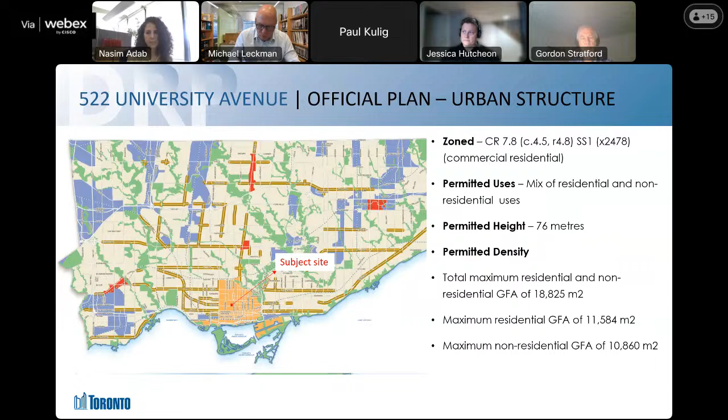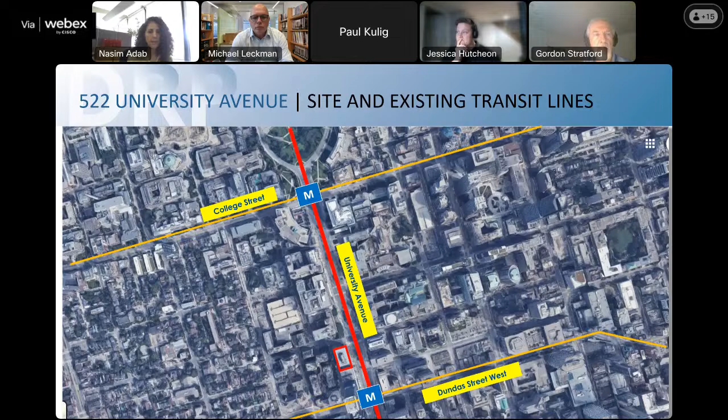The site is located within the downtown and central waterfront area, and the as-of-right zoning is CR with a maximum allowable height of 76 meters. 522 University is designated as mixed use in the official plan, and it is very close to many institutional lands. The site is also close to a number of existing surface and underground transit lines and stops, including the University Avenue subway line and College and Dundas Street streetcar lines. It is located on the southwest corner of University Avenue and Elm Street, with 3 main frontages ranging from 38 to 62 meters, and is about 2,400 square meters in size.

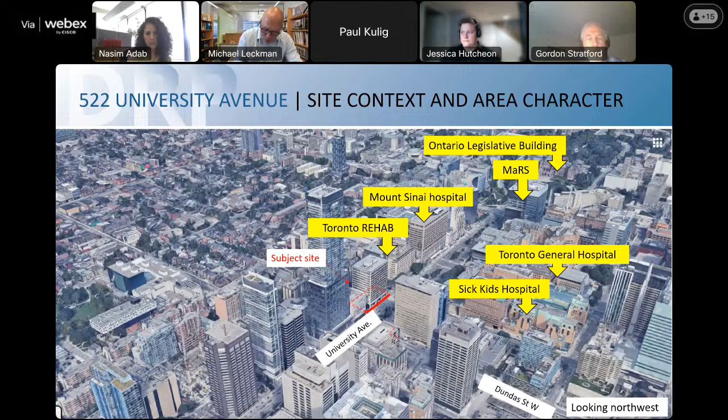I will now go through a couple of bird's eye views to better understand the context and character of the area. This is a view looking northwest, identifying many important health and science related buildings, as well as the Ontario Legislative Building, with the subject site identified by the red boundary. Another view from the opposite angle shows the prominent typology and built form that contribute to the defining character of University Avenue.

As previously mentioned, the tower is proposed to be located on top of an existing building which has heritage attributes. This building was built in 1972 for National Life Assurance and was designed by renowned modernist architect John C. Parkin. The property has been identified by the city as having cultural heritage value, characterized by the treatment of all four elevations with a gridded concrete frame above a colonnade of concrete columns. A heritage impact assessment has been requested, and the site is subject to a view corridor which protects the City Hall silhouette as viewed from the north sidewalk of Queen Street. I will provide more details on that later.

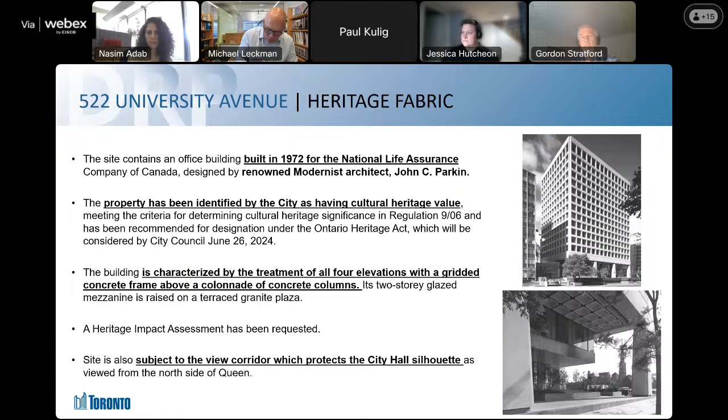The existing 14-story building is characterized by the depth of its punched windows, robust columns, and materiality, which is precast concrete.

The building is attached to a two-story component on the south side of the property, which I'm showing here with my cursor. This two-story building is part of the subject site, which stretches from University Avenue to Simcoe Street.

There are a number of towers already built on University Avenue. There's also a concentration of modernist architecture, which contributes to the ceremonial character of this corridor.

As discussed previously, the existing building is an interesting combination of different layers and attributes. Here is the boundary of the site, starting with the footprint of the ground floor and columns.

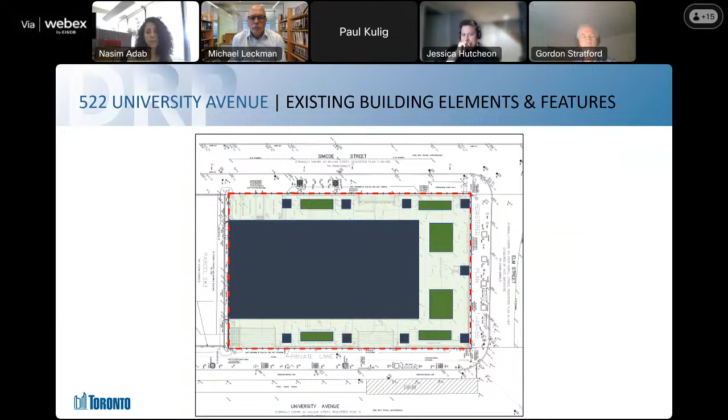Under the building, there is a semi-covered plaza, which is a combination of hardscape and planters. The plaza is sitting above the street level on all sides, which we will show in the following pictures.

To access the plaza and enter the building, users need to walk up the stairs shown here with the yellow color, or they need to use the ramps shown with the orange arrows.

The access to underground parking and loading area is on the south side of the property and along Simcoe Street, shown here with the blue arrow.

And finally, the building sits on top of this open space with very robust columns.

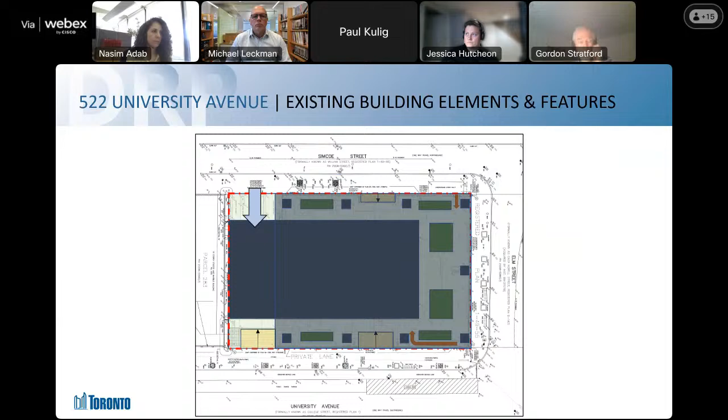And the applicant's design team suggested redirecting it to Elm Street for better accessibility.

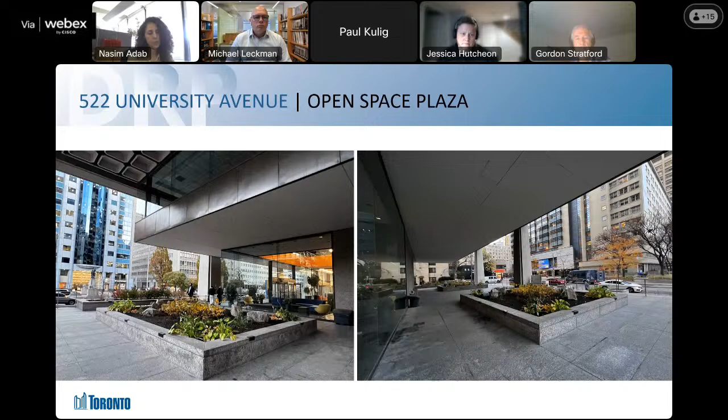The next few pictures focus on the landscape features in the plaza. Some of the planters are bigger with more vegetation, and some are narrower, but all have a similar design language.

On the ground floor and along the edges of the building, there are retail spaces which set back from the property line, and you can see one of them here in the picture to the right.

Moving to the discussion of planning policies, the City uses many planning policies and frameworks to ensure the delivery of good planning and healthy, complete communities.

These documents include the Ontario Planning Legislation, Provincial Policy Statement, and Places to Grow. One of the most important documents we use is the Official Plan, which provides direction with respect to heritage conservation, land use, built form, and public realm. But for now, I'm going to highlight one of the important key policies related to the view corridor.

This policy elaborates on the importance of Queen's Park Legislative Assembly, Old City Hall, and New City Hall as important sites with great prominence, and therefore any visible intrusion behind the silhouette of these buildings should be prevented. Additionally, the view to the building should be protected from any obstruction.

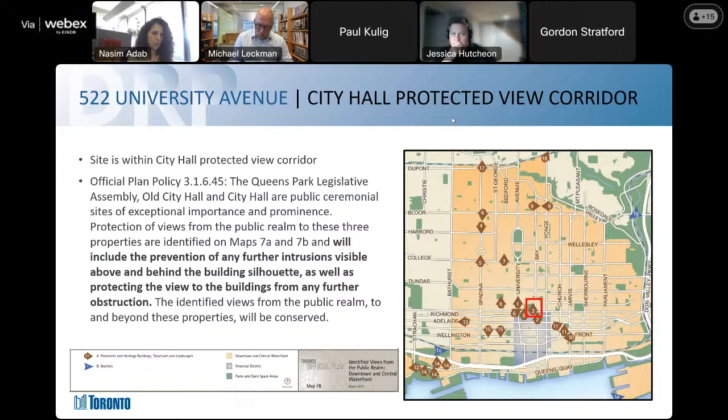Since the site is located within the downtown area, many of the downtown plan policies will also apply. I will go through them very quickly.

Starting with the Health Sciences District, the policies talk about non-residential uses within this district to support institutional growth, and that buildings should create appropriate physical connections to contribute to the district's ability to share resources, facilities, and technology. There are also some policy directions regarding the importance of public realm expansion and enhancements.

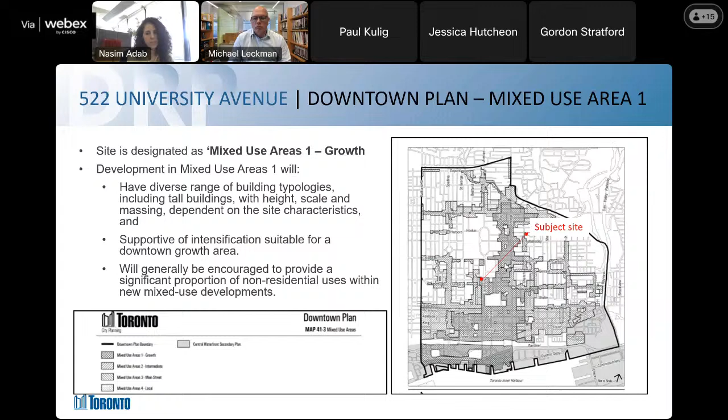The site is within Mixed-Use Area 1, which means there will be a diverse range of building typologies, including tall buildings, depending on the site characteristics. It also emphasizes the importance of non-residential uses. Based on the downtown plan, there are also some protected parks in close vicinity.

However, there will be no shadow impact on those parks and open spaces coming from the proposed development.

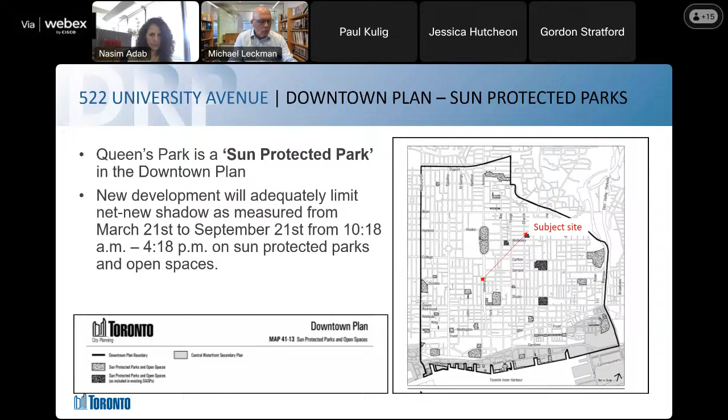Finally, the subject site is along a designated great street, University Avenue. Based on these policies, the development will enhance the civic role of such streets and improve mobility. Public realm improvements will create a unified streetscape that identifies the character and heritage value of each segment.

Improve the scale of pedestrian clearway and public gatherings, and prioritize tree planting. There are also a number of important guideline documents that the City uses to evaluate a design proposal, including but not limited to tall building design guidelines, growing up guidelines, and pet-friendly guidelines.

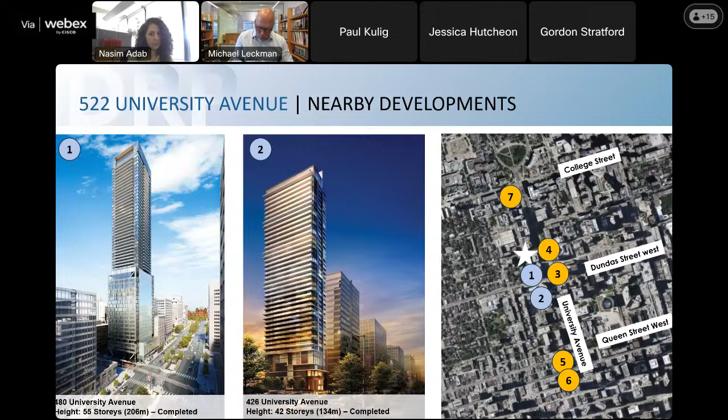Using these planning frameworks and performance standards by both internal and external teams, University Avenue has already seen and will see a great level of intensification. Some of these approved, constructed, or under review and appeal tall buildings include 480 and 426 University Avenue, 481 and 505 University Avenue.

You can see their location with the blue color on the key map to the right: 200 and 250 University Avenue, and finally 700 University Avenue, which is a bit further from the site at the intersection of College and University Avenue.

I will now provide a quick overview of the proposal that was brought to the DRP session back in November 2023, starting with the Heritage Building. The applicant's team talked about the Heritage Building, its conservation and approach to intervention. Parts of the building were proposed to be retained, and some areas were proposed to be reconstructed or removed.

The retention of 60% of the interior and exterior of the building will also help with minimizing the carbon footprint. There were some comments from panel members regarding the materiality of the reconstructed part and how it can celebrate and pay homage to J.C. Parkin's building.

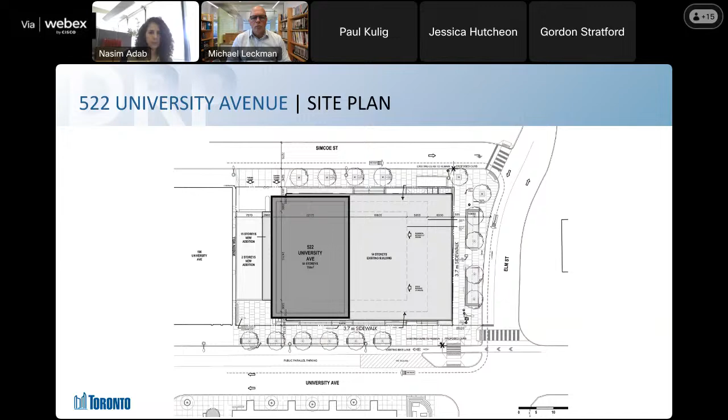Above the existing building sits the tower. The location of the tower is directed to some extent by the conservation of the heritage building. There were some discussions around design solutions and how to create a harmonious relationship between the tower and the existing heritage attributes. I should also mention that the office component includes the base, meaning the existing building, and the backdrop that you see in this rendering, which is a new addition.

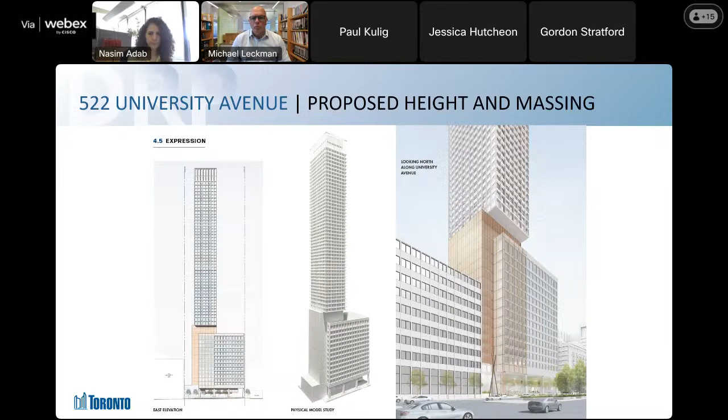In terms of public realm, we received comments from panel members regarding the streetscape and open space plaza. The proposed design looked at relocating some of the stairs as well as one of the ramps, but keeping the parking and service access in the same location. It also considered opening up the edges of the site to provide more greenery, a sense of openness, and sitting places, as shown in the next few slides.

The proposed improvements also include the curb realignment along Elm Street, as well as new trees and a bike lane along University Avenue. This is a view from University Avenue looking north, and the proposed changes show improvement with sitting places, tree planting zone, pedestrian clearway, and more vegetation, as well as the bike lane.

Another view looking south on University Avenue, showing the grade change from the sidewalk zone. Again, the proposed improvements show the openness, the seating places, and more greenery. Simcoe Street looking north, and the proposed design showing more greenery. Just a reminder, these are all from the previous package that was submitted by the applicant's team.

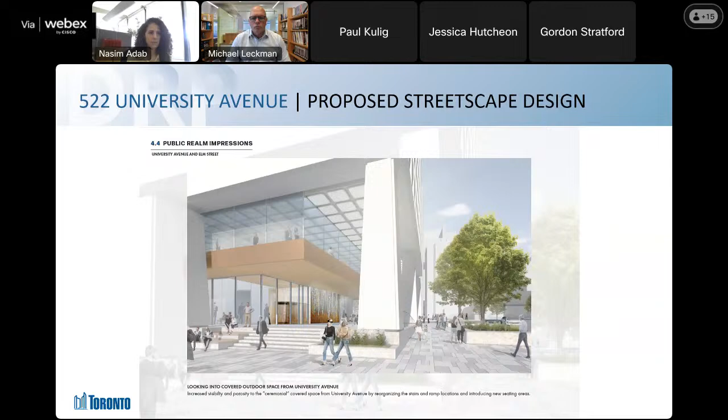A view to Elm Street looking west, showing the new stairs, planters, and sidewalk conditions. Lastly, the applicant's design team talked about the sustainability approach, and how high degrees of TGS and minimizing embodied carbon can be achieved through the conservation of the existing building, orientation of the new tower, window-to-wall ratio, green roof material, and energy performance methods, to name a few.

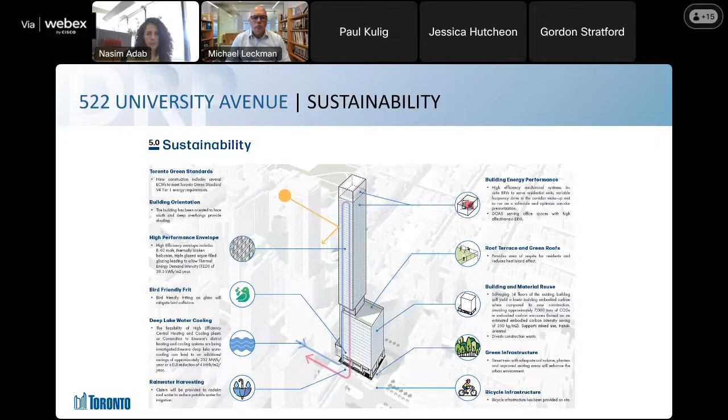With that, I can now move to the issues of focus. We would like to seek the panel's opinion about the following issues: the conservation strategy in relation to the significance of the existing heritage building on University Avenue as a civic corridor.

The conservation strategy for the existing heritage building in relation to embodied carbon and other sustainability strategies in general; public realm, ground floor plane, street edge and sidewalk conditions; treatment, activation, and accessibility of the plaza and its relationship with the proposed uses; materiality and treatment of the south end of the existing building; and the design relationship of the new tower with the existing heritage building, its attributes and character, in the context of University Avenue.

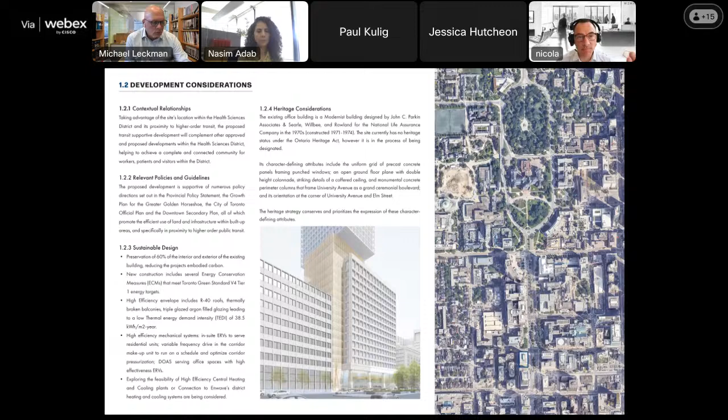Nasim really well described the overall building, so I won't go over it from an overall standpoint. She talked about the contextual relationships, the relevant policies, some of our sustainability features, and the heritage considerations. Now, one thing that when we read through the minutes last time, we wanted to clarify exactly which pieces of the building are coming down and how we're addressing it, because some clarification was needed.

The existing building is, diagrammatically, on the left under number 1, existing conditions. That's a rectangle building that Parkin designed, and it has 4 major columns along University Avenue and Simcoe Street, and then 3 major columns along Elm Street.

The portion that we are demolishing to make way for the new tower is the portion that's hatched in red, and it's roughly around the 3rd column from Elm Street.

And once we do that and design the building and reconstruct a portion of it, we actually reconstruct it in the exact same footprint as what we demolished. And then we have a small podium that's required to hold up the tower that we're putting on top, which you see in the background here.

That's the part that in our renderings is colored in that orange color. So we call that the backdrop.

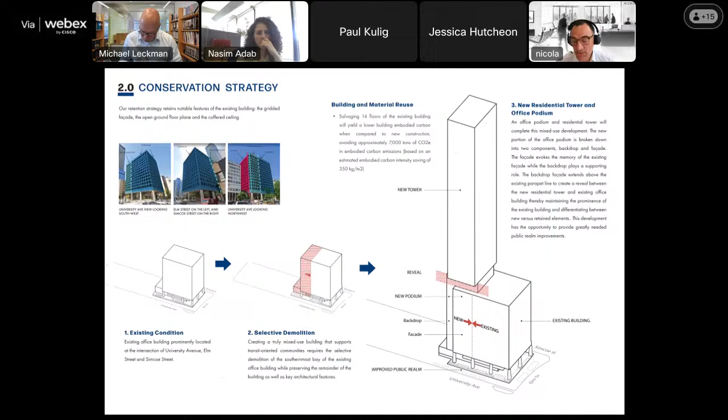So the next two slides, I'm going to hand over to Sharon from ERA, and then after that I'll pick up and address the issues that were brought up in the last design review panel. So Sharon. Yeah, thanks, Nicola.

Sharon Hong from ERA, I'm a planning associate here. Pleased to be coming before you again on this project.

As Nicola said, with ERA as the heritage consultant on the team, we worked collaboratively with WZMH and RJC to get to a place where some of the key moves of the design are driven by and inspired by the key character-defining attributes of the building designed by John C. Parkin. Firstly, there's that open ground floor plane speaking to this democratic modernity of the Parkin design, with the indoor-outdoor fluidity expressed through details like this coffered ceiling treatment.

Secondly, this open ground floor plane itself functions as this extension of the public realm, with its prominent situation on University Avenue, and the monumental columns framing University Avenue as this grand ceremonial boulevard.

And then there's the building on top itself expressing this uniform geometric grid of precast concrete, which is actually by Beer Precast. They played an important role in building concrete modernist Toronto. They also worked with Parkin at New City Hall as well.

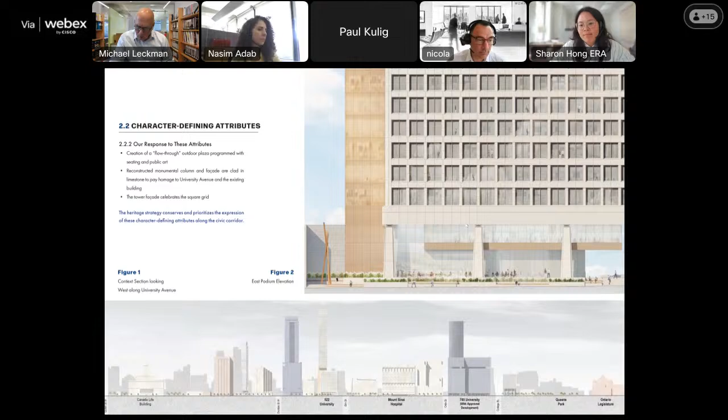I won't read this extensive list here because I've provided it for you, but by and large, when we read through the minutes, there were these themes that came out, and we picked on some of these issues and addressed them in our presentation, starting with the streetscape, the public realm and plaza. You'll see a little bit more development on the public realm, and in particular in the covered space below.

Our approach has always been about engagement, about trying to engage University Avenue, Simcoe, and Elm Street, because as it stands, the existing building really doesn't do that. It's almost like a barrier that's been placed on the podium level. But our approach is engagement, so we're basically deconstructing a lot of those planters that were there, reconstructing them in a way that people can inhabit them. We've also developed the covered plaza, which I'll show you in a few minutes, that engages as well.

There was a comment on the accessibility ramp, and we tried really hard to reorient it. If we were to reverse its flow, as was suggested in the minutes, it becomes too long and doesn't fit between the two columns, and it would need an additional landing and so on. So we kept it in its current configuration, which we're happy with. As you come up the ramp and finish at the top, you actually get this beautiful view down University Avenue, so we're happy with that experience.

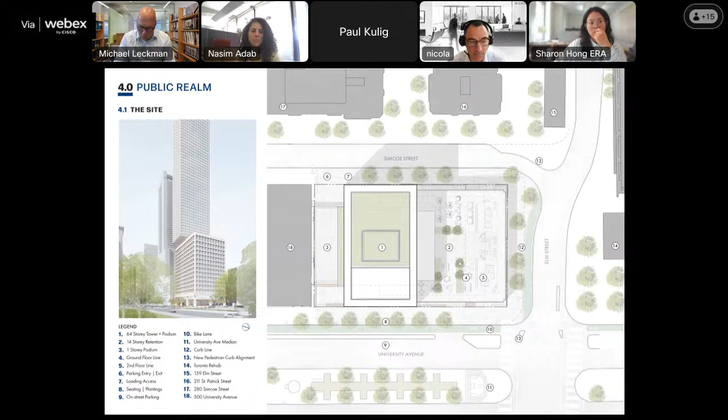From a site planning standpoint, Nasim mentioned where we are. I won't go through this too much, except to show that we've actually developed the roof terrace in greater detail. I'll talk about our site plan just to give you one update on our public realm.

If you've been to the site recently, you'll know that University Avenue is currently under construction, and they're building this bike lane now. They're building it to roughly a 5.7 meter right of way from our property line to the curb of the bike lane. 3.7 meters of that is a clear sidewalk width, and the remaining 2 meters is taken up by a planter and a buffer strip between the planter and the bike lane. That's the current configuration being constructed now.

A little bit about the ground floor plan. On the University side, we have the entrance to the office, number 2, and the lobby to the residential, number 3. Number 1 is that covered outdoor space we talked about, with the planters Nasim showed in the pictures. It's an uninhabited space for the most part — every time I've been down there, there's really nobody underneath there — and we want to change that. We want to make that an engaging space.

So we face the two entrances to our residential and office onto the plaza. We again take the planter that's there, deconstruct it, and turn it into fun, animated seating areas. Then we make something of the solid wall facing north onto the plaza to animate that space even further. One thing Nasim noticed is that our original staircase was between columns 2 and 3 — we've moved it to really play on the flow-through aspect that Parkin had in the original design, which was a flow-through lobby.

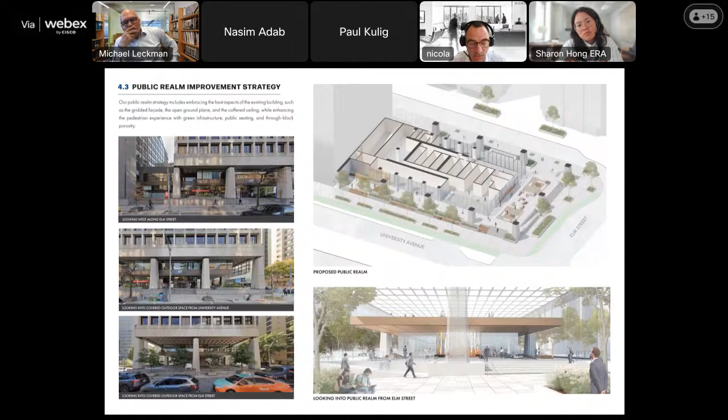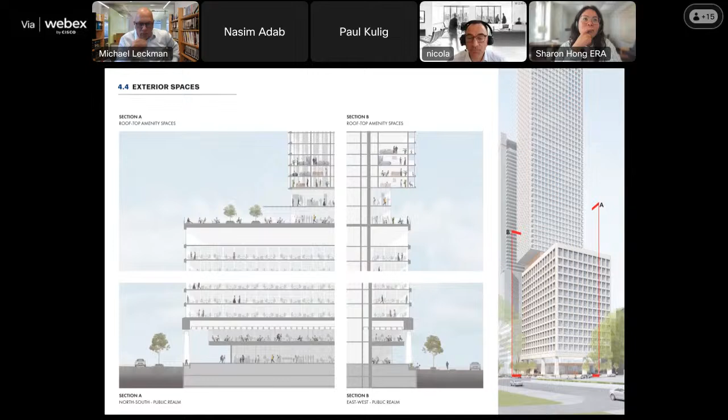We're proposing a limestone for use there. We find that quite interesting because we think Parkin used the smooth precast concrete to actually mimic limestone, and now we want to introduce limestone to mimic the precast concrete. We feel that's a really nice way to tie it into University Avenue as well.

Our public realm remains relatively the same as what we presented last time: 3.7 meters wide, planters, a buffer, and then the bike lanes.

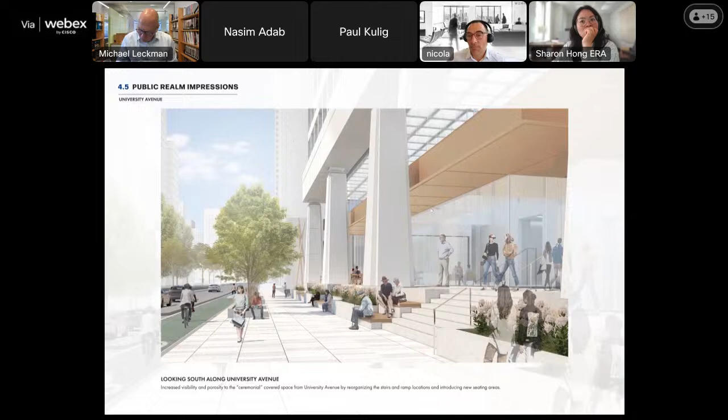The upper plaza, right now the existing condition that Parkin left us with, has this very transparent lobby, an office lobby that we're picking up on and want to make even more clear by introducing glass fins as a support to our curtain wall, and the floating box that is up above. That's one of the things we love the most about this building. We really want to retain that and play up on that.

Looking into the covered plaza from University Avenue, you can see the porosity we're creating through the site, really inviting people up to that plaza level, and looking at creating an opportunity for an engaging art piece underneath that space. It could be this wonderful sort of landscape being projected onto a screen to really warm up that space. Of course, we're in downtown Toronto, a lot of concrete and steel, and we want to introduce more greenery, more images, but in a way that's playful and introduces public art into the space.

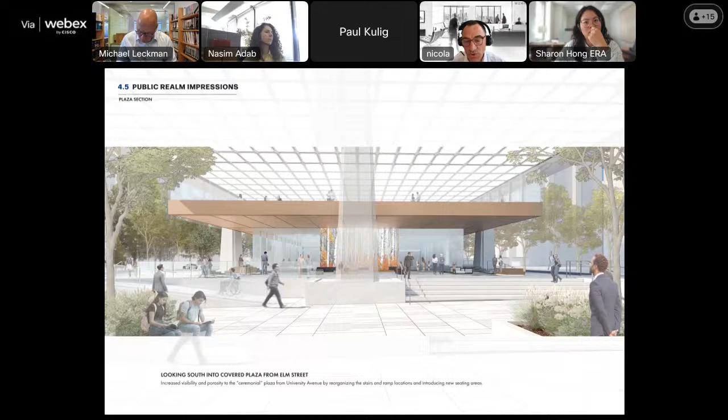You can now see the distinguishing features between the precast facade by Parkin and our new facade, knitted together with the limestone, introducing new joint lines that distinguish it from the existing building, but still tying it together with the same proportions and same window openings.

I talked a lot about our expression, and we've advanced that quite a bit, both in imagery and in our floor plans, so now our floor plans match our elevations. There were some questions as to how the grid actually turns the corner.

We've got that sorted out. We've created datums along each floor that are the same. Then as we turn the corner to the balconies, we actually adjust the sloping profile slightly just to allow for that balcony to work.

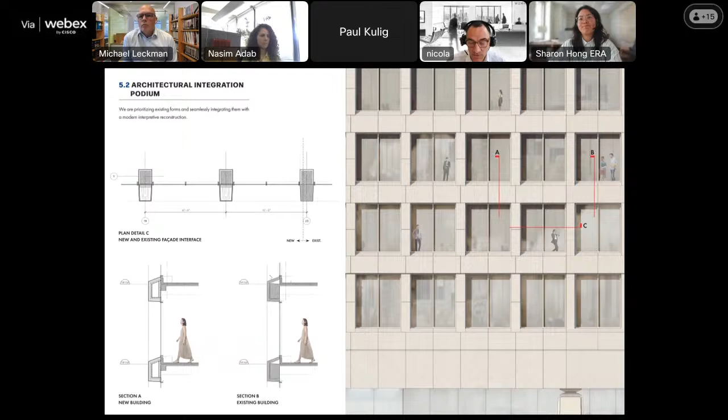Nicola, you've got just a few slides left. Is that right? Yeah, that's correct. Thanks, very good, Michael.

So here we have the gridded facade, and we've sorted out how we're venting with mechanical louvers, how we've created this nosing, and where the louvers happen on the facade to make it very consistent. We've also looked at how the metal panel is actually being constructed. We think the fins will be done in two-story lifts, with these nosings placed in between them, and likewise on the balcony section, a similar approach.

Then I've spoken about materiality. We studied what is the lightest material we can put on the building that still gives us the look we want and has the least amount of embodied carbon. Metal panel turned out to be one of the better solutions because of its lightness, its flexibility from a design standpoint, and it still gives us that deep grid expression.

In the connecting section, or this backdrop section, we're using a textured glass facade, and we're looking at various metal meshes that can be embedded in the glass to give us a very distinct but background look. Our introduction of knitting the old facade with the new using limestone, we think, is a very nice way to tie the two together.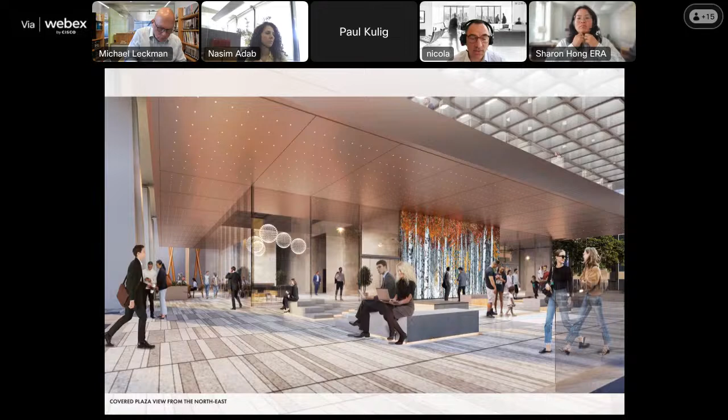A view from the public realm along Elm Street, then our intersection of University and Elm, and then our overall view from the north.

From a sustainability standpoint, we are striving for more electrification of the building. We've got now 30% of our heating systems will be electric, and we're looking at partial electrification of the domestic hot water. Deep lake water cooling is still in the feasibility stage, and we're looking very closely at that.

We've limited our underground construction to 2 levels, which from a carbon footprint standpoint makes sense. I've mentioned how much we've saved by using the existing building. And from a building orientation standpoint, we've now got deep overhangs to provide a lot of shading.

Our balcony to wall floor ratio is about 39%. So we've got 39% balcony, and over 60% of it is non-balcony, but yet 8 of the 12 units still get balconies, and the other ones get Juliet balconies.

We've got a fairly efficient wall to floor area ratio of about 0.436. A round shape is the most efficient, but a square is just a little bit more efficient than this. So we're really pleased with that number.

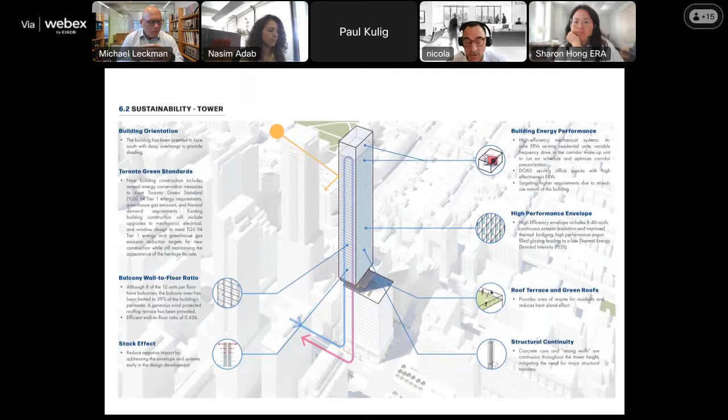We've gone through great pains to make sure that our strong walls go right down to the ground, so we're not creating inefficient structures and diagrids that involve a lot of carbon intensity. Thank you.

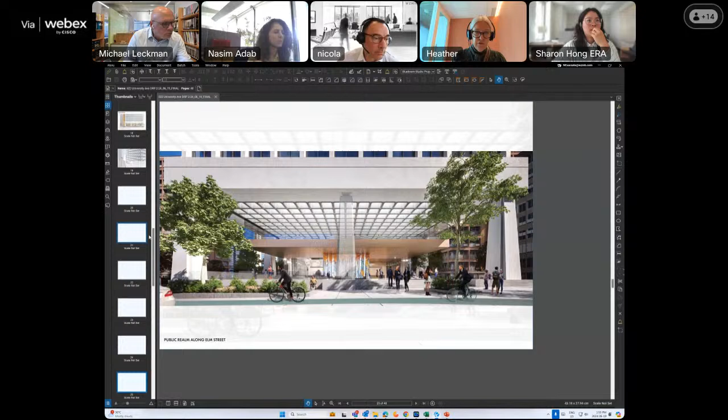And the height of the parapet or guard at the top of the existing / new office building - it looks like there's a glass backup to the precast / limestone parapet. If you could go please to page 23. I just want to concentrate on the new south, where the office building kind of dies into the copper curtain wall facade.

So there was originally a negative corner at that building, which you're retaining, but then that little bit of south facade that will be limestone is now set back. And is it a bit shorter? And that's why we can see the glass beyond it? Or I'm just wondering if you could describe that detail - it's a question from the city, so I just wanted to clearly understand it.

Thanks for pointing that out, Heather. I think there's a reentrant corner similar to what Parkin did on the north, on all four corners. So we've replicated the reentrant corner. I'm not actually sure why we recessed it like that - we have to probably study that a little bit further. It could have been trying to meet a grid in the facade as well, but I would likely look at that as almost matching the existing condition, which is more of a flush condition. So a reentrant corner, and then we go back to a flush condition as we turn. Thanks for pointing that out.

And sorry, one last question at the ground floor - there's a small section of ramp at the northwest corner.

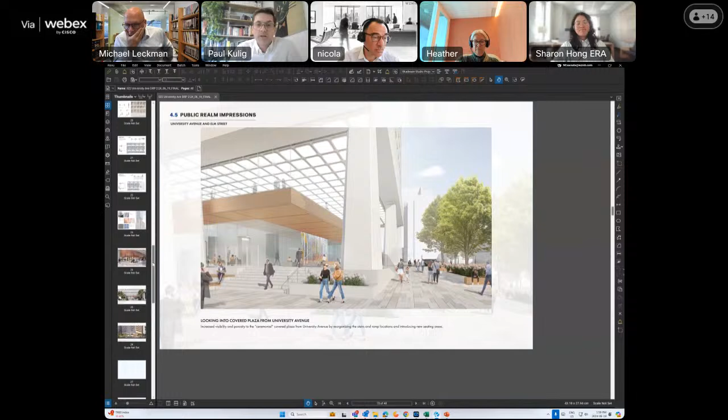Very simple question. If you could just clarify the second floor where there's the mezzanine that exists under the larger portico. There appears to be a bit of an open space to the lobby below. If you could maybe just clarify what's proposed there. It's sort of shown as generic blue office space, but if there's some other thoughts about how that could be programmed at this time, just curious where we're at.

So you're talking about this space here? Correct, yeah, that level. We feel that is one of the features of the building. Right now, when you walk the building, the coffers have been covered over. They're exposed on the soffit, but covered over in the interior space. When we look at the original reflected ceiling plan, Parkin had it going all the way through. So that's the one thing we want to retain and reinstate, to bring those coffers all the way through. They may be under the ceiling tile, I'm not sure, but they were certainly on the reflected ceiling plan drawn all the way across.

The one issue with that space, I was just at an event there last week. It doesn't have a great floor to floor height, it's a very compressed space. So I wouldn't suggest office in that space. That seems to me more like an intimate event space or a high-end restaurant type space. I'm not sure I'd recommend office in that area. I would look at that as more part of the public realm and make that more engaging as a space.

But just to clarify, that decision hasn't been made. It'll be sometime down the road as far as the actual use or tenant. Correct. Okay, correct, yeah, all right.

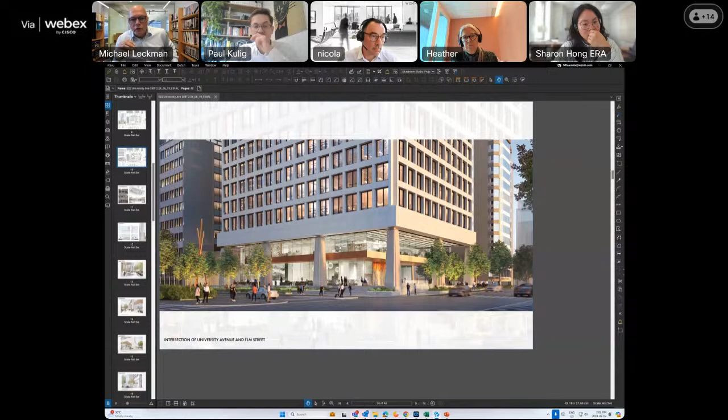Thanks Paul. Well, I'm going to use my opportunity as chair to ask a few questions, these are kind of yes/no questions. On the ground floor, under the floating second floor, you've got a mail room with a decorative screen. Is there any opportunity to consider changing the height of that space so that the second floor slab we're seeing in this view could actually be expressed as floating?

That's that area there where your cursor just was, on that north side. Sorry, not there, nope, or there. Oh, north side here, yeah. So you've got an ornamental or decorative wall finish there to make a virtue out of a necessity. Is there any chance to change the volume so that expression of the cantilevered or floating floor could be complete? And I guess the question is, could that be studied?

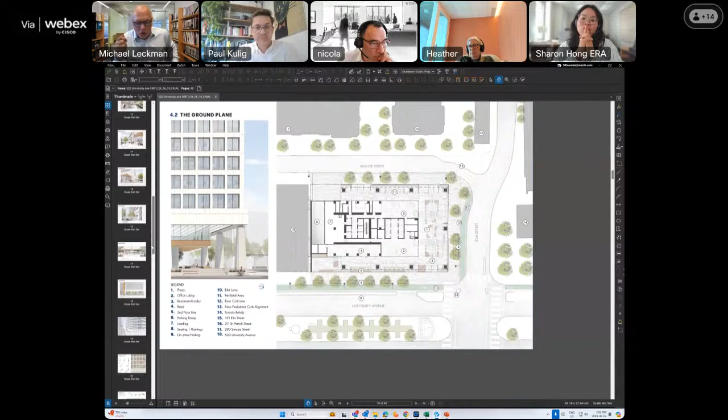So in this area here? Correct. This is currently a solid wall, there's an elevator behind this wall actually, that services the lower level. So we're keeping that elevator right now. Okay, that's clear, but yeah.

Second thing is, any chance of there being coffers on the tower soffit? Yeah, we are still studying that. Right now we've looked at a very simple grid. When we studied coffers up there, they looked a little bit out of place, but maybe we got to do it again and find a way to interpret the coffers differently. Part of the issue is it's not complete, we end up on a half module. But yeah, that's something we're still studying.

Is there a chance, I'll continue with these yes/no questions, in the beam that connects the massive monumental columns, there's an articulation that receives the column tops toward the north. In the drawings toward the south, you didn't echo that detailing. Is there a chance to continue that? Yes, reveal lines and so on. Yes.

And then finally, maybe the metal finish. Right now we've got precast as the existing, and we've got metal as the new. I'm assuming there are lots of opportunities to have the metal be not necessarily shiny, but have a range of possible textures that would fulfill the objective there.

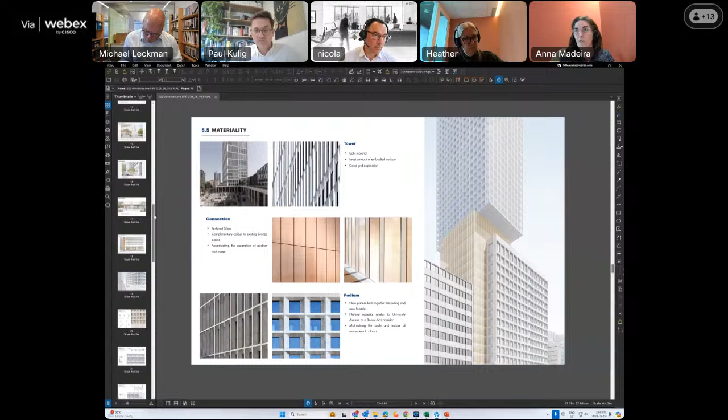One more comment on the public realm piece at the ground floor, where you have three uses: retail, office, and residential. It's really hard to distinguish those different uses on the elevation. So a few suggestions there. I think we talked about the retail and that box, and how that box might be able to help you express the retail at the base, sorry, the existing line of that podium.

And the plaza that's outside, so you've got the resi and the office both feeding onto that plaza. Now it's kind of a hierarchy question. The address is 522 University Avenue, and currently the only entrance facing University Avenue is that small residential unit. So is there a way for the office, even if you move the office entrance to the corner, so it could address both the plaza and University Avenue, is there a way for that to interact with University Avenue?

And then that leaves Elm Street for the residential expression, and that piece can feed out onto Elm Street, and give a fairly significant residential address its own place to exist. And last point, which is a small one.

Actually, I have two more points, sorry. The ramp, what you've done with the accessibility is great. Just consider that space between the column and the end of the ramp there, it's very, very tight. And that is a main entrance, people with strollers coming down there, there's a lot of uses for that ramp. So just think about that.

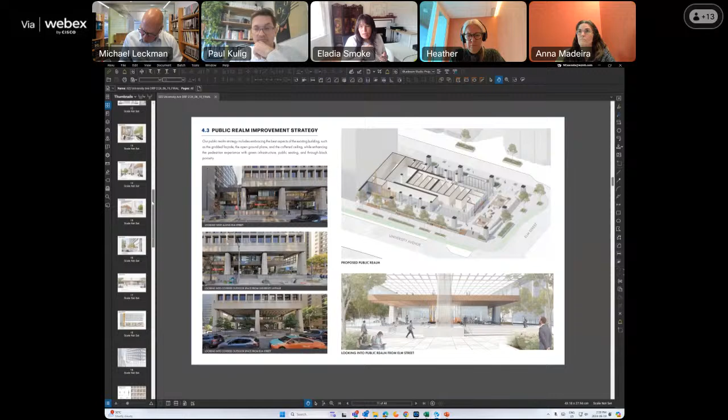Is there perhaps even a really innovative way of reflecting some light back in under there, using some reflective surfaces that are taking some of the south light and catching it and reflecting it back, perhaps? Just because it's such a deep recess.

It is facing northwest and northeast, the source of many of the super problematic winds for Toronto winters. So while these gestures are really valuable, at the same time, just be very realistic about how those spaces will be used and how people will feel in them, especially temperature-wise, and whether they really are going to get used. Sort of how do we deal with those really problematic northeast winds?

Things like that, I think, would be very important for sort of a considered gesture such as what I'm seeing. So I'll just leave it there because I'm sure lots of other people will have interesting ideas. Thank you.

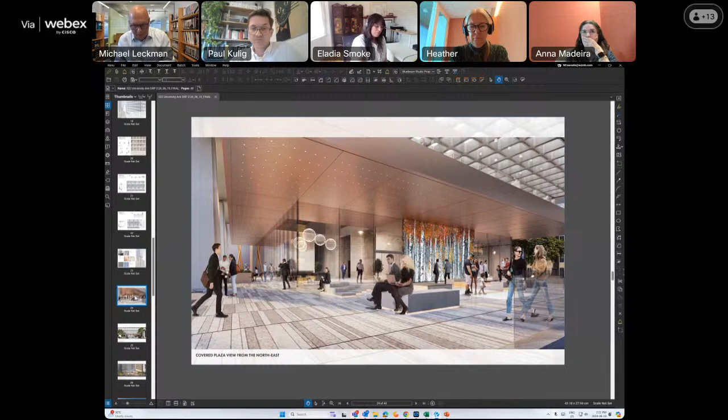All right, thank you. Thank you very much for your presentation. I appreciate the clarity of your package. It was very easy to read. And you've probably already heard a lot about the building, so I'm going to focus again on the public realm here. And it's great to see the project come back to the panel.

I took the old package and the new package and was really looking at what the subtle changes were at the ground floor. But I was pleased to see those were made. I was also pleased to see that you explored the ramp redirection, and I understand the challenges of grading on a site like this. A very small amount can make a big change at either end.

So a comment carried forward from the first review is just, I appreciate that seating on University. I think you've done a good job of sort of adding to it at that northern stair on University. The addition of the seating there just again adds to and reinforces that public edge. It would be interesting to see if there was a way also to accommodate space beside some of these seating elements for wheelchairs or mobility devices, somewhere you can get off of or out of the clearway.

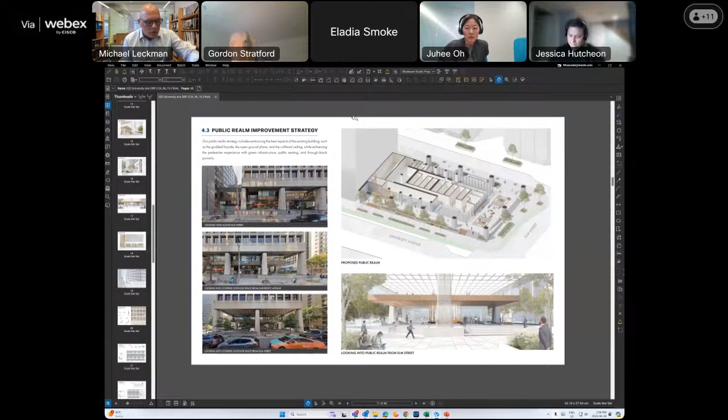On those points, we're being asked to vote. So, Lee Ann, if you could remind us of the definition of the vote.

The vote is intended to provide emphasis and clarity to the discussion and an indication of how well the project advances the panel's mandate of promoting design excellence. Support means that the panel advises that the design should continue and include refinements that were identified during the discussion. Support can be provided with a related condition or recommendation if desired. Non-support means that the panel advises that the project should be redesigned to address the issues identified during discussion. Either vote is supported by all the comments that panel members have made, and they stand recorded and will be part of the final record of the meeting today.

So I'm going to go down the list in the same order as you provided your comments, and I'll ask you for a vote of support, non-support, or support with conditions. Before I do that, I'll pause to see whether anyone wants to include any conditions on the vote. Often that's done with an electronic raised hand. I'll give that a few seconds. Usually they're pretty prompt.

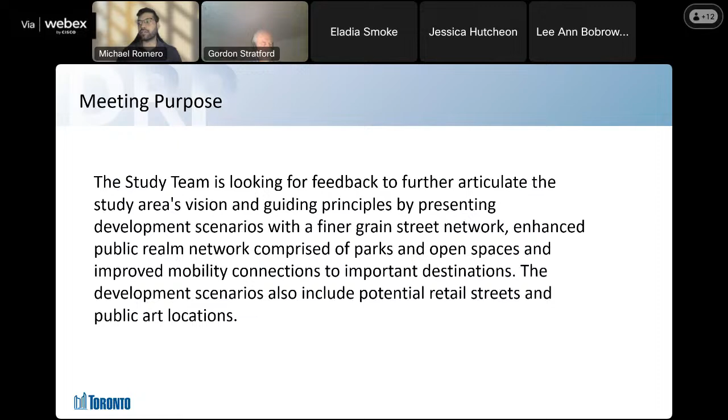Since the first meeting before the panel, the team has revised the study vision and guiding principles, and created the development scenarios we'll see today. We have a public realm plan, connections, and retail street plans as well. The intention is to update the existing Sheppard East subway corridor secondary plan and conform with the growth objectives in the growth plan, including those for major transit station areas. This team is seeking advice from the panel as we proceed to the next phase of the study.

Following council direction to update and refine the secondary plan, staff are looking to implement a new plan for the area. The current secondary plan places a focus on leveraging transit infrastructure, whereas this study looks for a more comprehensive framework which considers urban design, parks and open space, public realm, retail, and new connections.

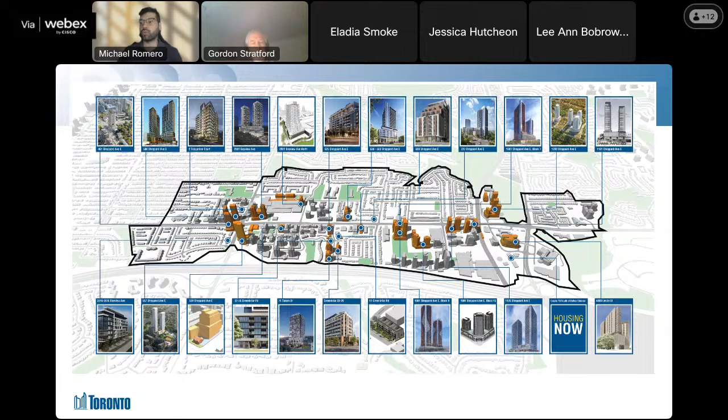A snapshot of the demographics shows that the study area has been growing within the last three census tract data periods. Looking at the population growth from 2011 to 2021, it has been greater than in the rest of the City of Toronto, and the immigration population has also been increasing at a greater rate than the city overall.

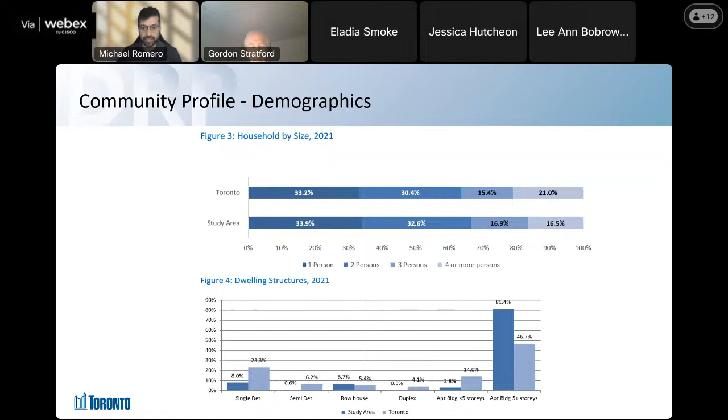Looking at figure 3, data shows that household size rates are comparable to the City of Toronto. But one thing we'd like to point out, looking at figure 4, is that intensification in the form of apartment buildings is driving growth in the study area, representing nearly double the rate of the rest of the City of Toronto.

Now looking at some of the planning policies for the area. I mentioned major transit station areas — the study area has three: Bessarion, Bayview, and Leslie. City Council adopted the MTSA policies back in 2022 for these areas; however, these policies have not yet been adopted by the Ministry of Municipal Affairs and Housing.

An important aspect the team wanted to raise is the adjacencies between stable land uses, those being neighborhoods and apartment neighborhoods, and mixed use areas where greater intensification is anticipated. A site adjacent to stable land uses requires transition per the official plan. However, these transitions may be challenged due to lot depths and lot configurations, which may also result in piecemeal type of development.

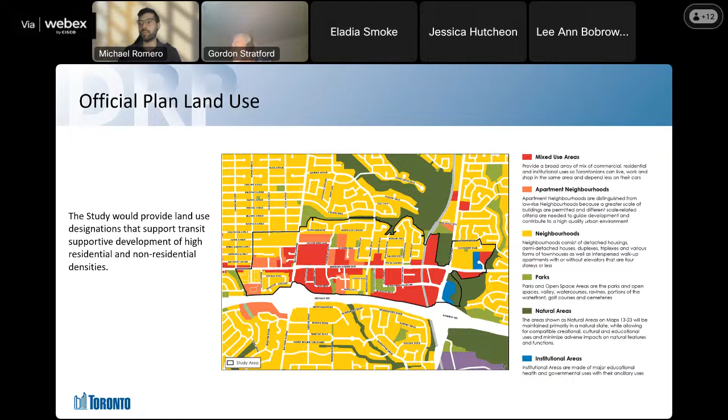As mentioned, we've heard comments from the design review panel previously, including a more refined vision that speaks to the area context. We also heard to create a much more human scale connection in the neighborhoods, as the previous plan had a very heavy transit infrastructure approach. We also heard about optimizing opportunities for greater connections to parks and new park spaces and open spaces.

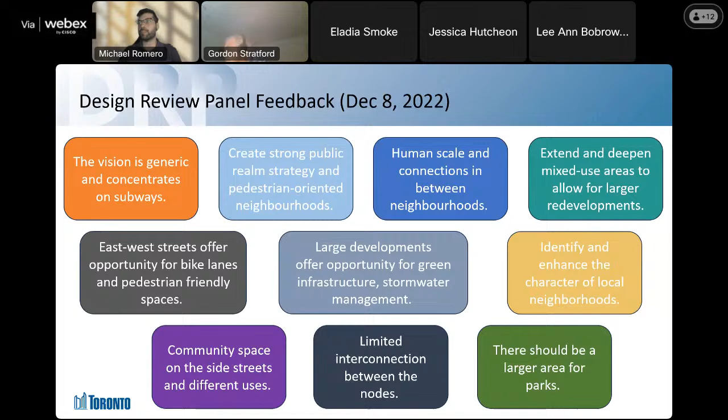The public has also raised comments such as balancing the need for housing while minimizing impacts to the street network. We also heard about creating opportunities for more parks and open spaces and connections, and about the Don River Valley system being an important character in the area.

So as mentioned before, we're here presenting a revised vision and guiding principles, among other documents. The vision and guiding principles are intended to create a more nuanced framework for the study, placing greater focus on public realm, design, heritage, natural heritage, and leveraging existing uses such as healthcare and institutional uses. The guiding principles are based on five pillars: complete, connected, sustainable, prosperous, and livable community.

And with that, I'll turn it over to Sadaf. Hi all, my name is Sadaf Pourjavaheri from the City Planning Urban Design section. We are all excited to be back with this full in-house study.

As Michael mentioned, this work is in progress and there are a number of key issues we are trying to address. The Renew Sheppard East Public Realm Strategy is the focal point for the study area.

Public realm big moves create a shared sense of place that unifies the distinct neighborhoods and reinforces community identity by enhancing multimodal travel throughout the nodes and neighborhoods, anchoring and creating gateways for vibrant retail streets along Sheppard, and enabling great transit corners for placemaking, urban squares, and social gathering areas.

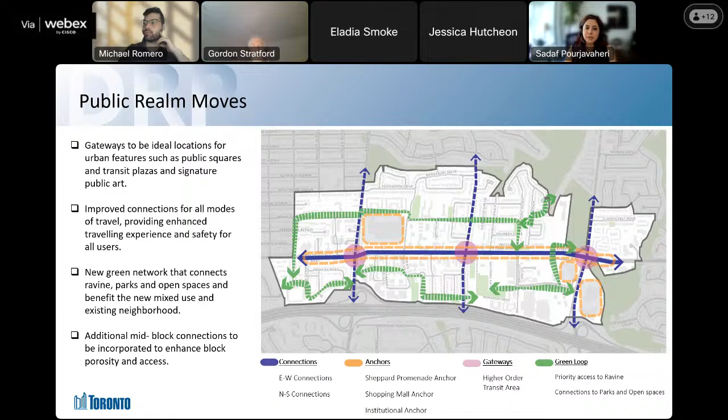This is to ensure that new development continues to grow public space and new parks. Part of the public realm strategy is to improve connections between neighborhoods and nodes to transit, local destinations, and existing, approved, and new parks.

Buildings will shape and define the character of our public realm and provide a welcoming and inviting pedestrian environment. The question we are asking ourselves is how we can enhance our public space to lay the groundwork for creative placemaking, and that's where the green loop concept comes into place.

Our study area is really large. After shaping our public realm moves and gathering feedback from public engagement sessions, we are now focusing on the pedestrian experience at the human scale, as recommended by the panel last time.

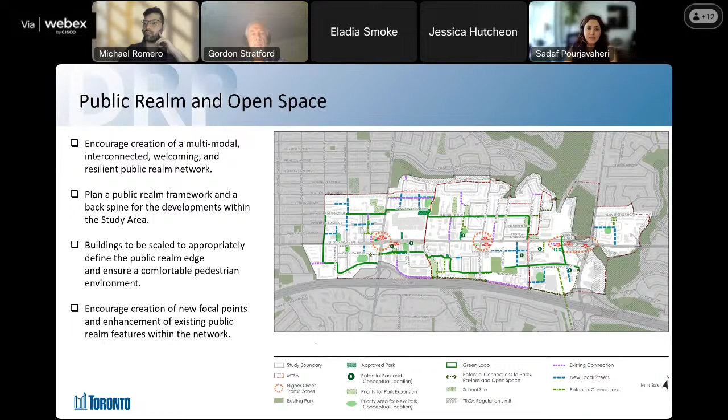Our public realm strategy supports a renewed vision to create a shared sense of place that unifies the distinct neighborhoods and reinforces community identity. Our public realm provides a distinguished layer into our design thinking, exploring elements like tree growth, stormwater management, biodiversity, swales, rain gardens, and permeable pavers where possible.

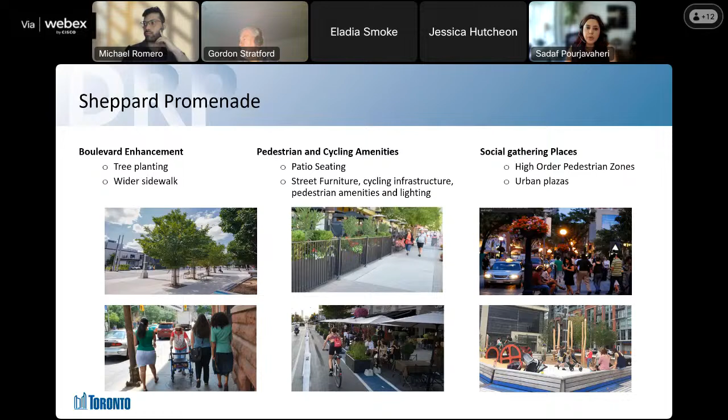As mentioned earlier, Sheppard Promenade is an anchor and spine of the study area that connects all the distinct neighborhoods and transit stations. One of our main objectives is to provide and improve consistent streetscape treatment that creates a welcoming space. With wider setbacks, we can achieve pedestrian comfort, retail spillover space, landscaping, and a double row of trees where possible, to mitigate noise and improve air quality.

As development occurs, we will have the opportunity to provide additional parkland, secured through proposed parkland from current development and future potential acquisition. Priority areas for new parkland are indicated in the conceptual park plan and reflect the most suitable locations based on identified soft sites and areas with low parkland provision.

Parkland priorities in the Sheppard East area include increased parkland supply in areas of low provision, especially around the Sheppard and Bayview intersection, where provision is lowest, and creating and expanding existing parkland in locations that increase walkability and improve the connectivity of the parkland network.

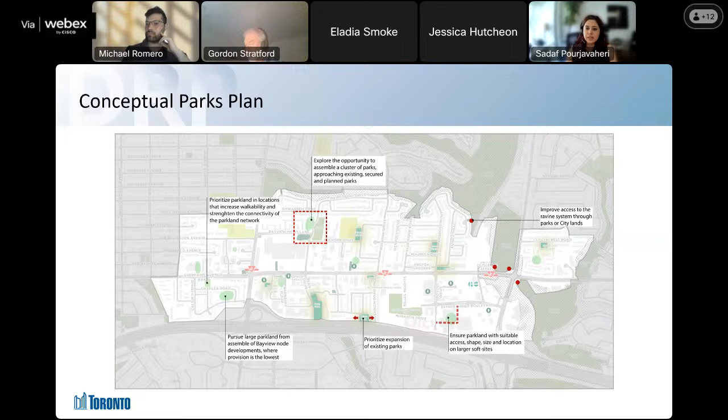Expanding existing parkland and potential future parkland assemblies of a size, shape, and location suitable for programming. We'll explore opportunities to create a cluster of parks, and as we get to the east of the study area, improve and expand access to ravine areas through parks and city land.

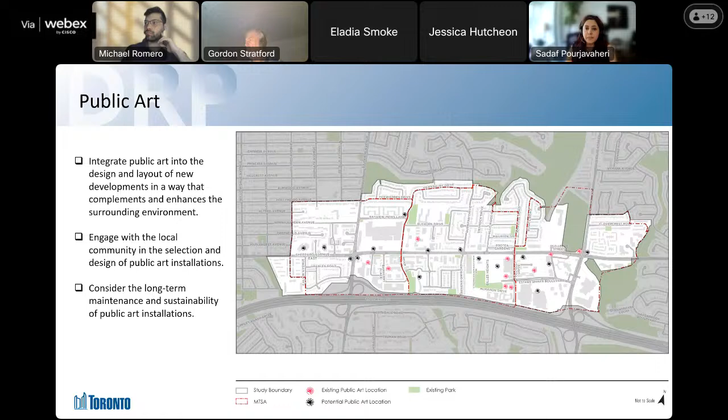Now we move on to public art. We have found it important to identify existing and potential public art locations within the study area. We are aiming to integrate public art into new development, ensuring each piece complements its surroundings as well.

Public art can be integrated into landscape, built form, or be a standalone piece.

To support Renew Sheppard's prosperous community guiding principle, we have identified opportunities to expand retail streets close to local and regional transit, and to support the expansion of employment and service uses that provide a range of business opportunities, supporting existing and new residents' daily needs at shorter distances.

And we have a question to ask the panel regarding micro retail: based on your experience, how can we encourage micro retail within neighborhoods in North York?

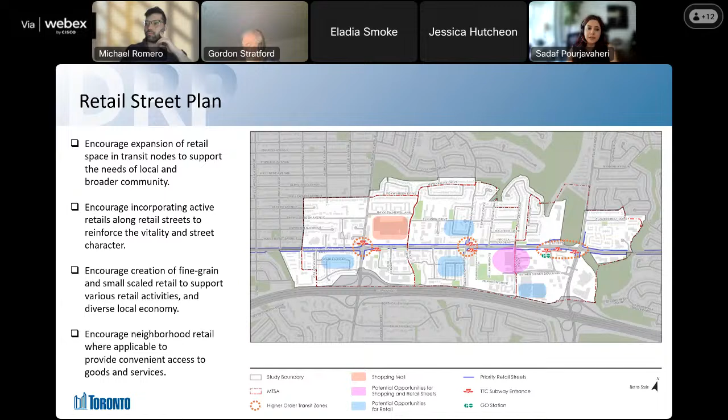Aside from appropriate retail along the Sheppard Promenade, we also allow fine grain retail within the neighborhood.

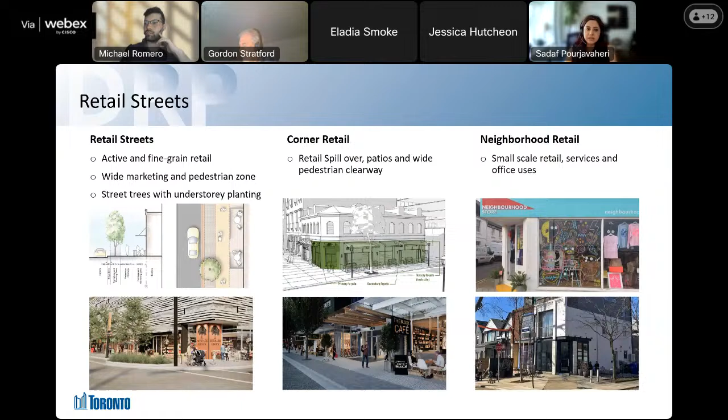The cycling network identifies the existing network of cycling facilities and trails, as well as proposed major and local cycling routes and multi-use trails. Major street cycle routes are intended to be main connection spines of the area and provide safe connectivity to the broader network of local routes.

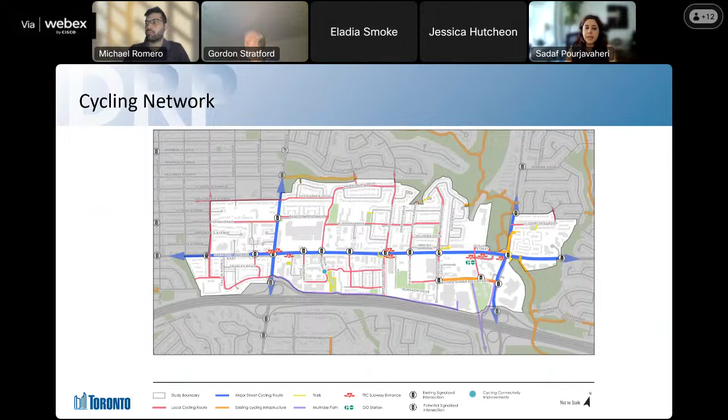Local cycling routes and multi-use trails are to provide a continuous network of links between major routes. Now I'll hand it over to Jenny to discuss development scenarios.

Thank you, Sadaf. I will be going over the intensification and transition strategy to ensure growth plan conformity. The Renewed Sheppard study directs intensification within the major transit station areas, also known as MTSA, highlighted here in red. This area represents a larger area than the current in-force secondary plan.

The existing secondary plan, Sheppard East Subway Corridor, general intensification approach was to identify key development areas while protecting stable neighborhoods in areas that we now call the MTSA.

Renewed Sheppard plans for higher levels of density that maximize the size of the area and the number of potential transit users that are within a 10-minute walk of a subway station.

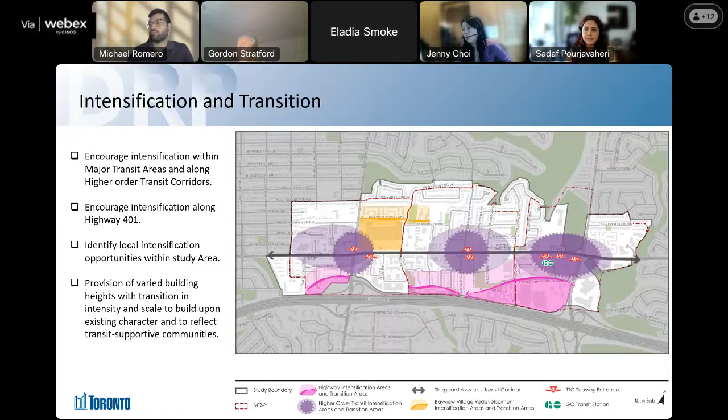These intensification areas include the highest densities closer to transit stations and corners, highlighted here in dark purple, along the highway, which is in dark pink, and lesser intensification in the transition areas, which are in lighter purple and lighter pink shades. In the next two slides, I will introduce development scenario 1 and development scenario 2, and highlight the key differences in built form, which is predominantly in the transition areas.

We've also allowed for tall buildings where lot characteristics permit, tall buildings along the highway.

And you will see that reflected in our models as well.

We used 3D modeling techniques to study the two scenario options for the built form.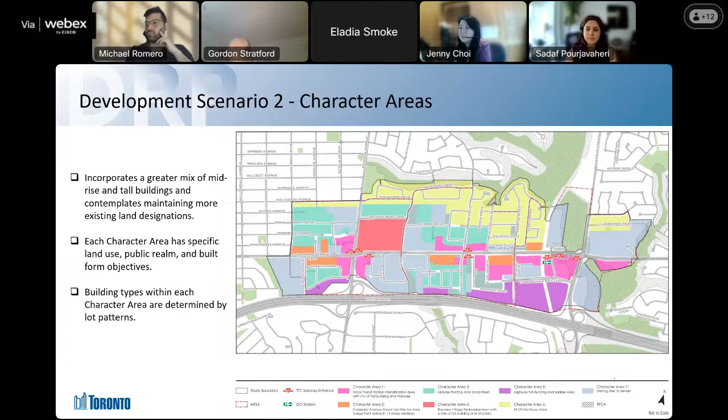Consistent with character area 2, this slide provides an overview of scenario 2, which envisions more mid-rise on Sheppard, providing for mid-rise opportunities between the highest heights at the transit stations and corners and the neighborhoods, including mid-rise opportunities along Sheppard itself.

You'll see that there is a different building typology as you move away from the transit corners, with more mid-rise opportunities in the interior transitional zones at Granley, the Irvington neighborhood, and the Talera Drive neighborhood. Further north, toward the secondary plan boundary, it also imagines preservation of existing built form, different from scenario 1.

It maintains the existing built form along Hollywood, closer to Sheppard, Protea Gardens, and the Maureen neighborhood, as well as the neighborhood on the northeast corner at Sheppard and Leslie.

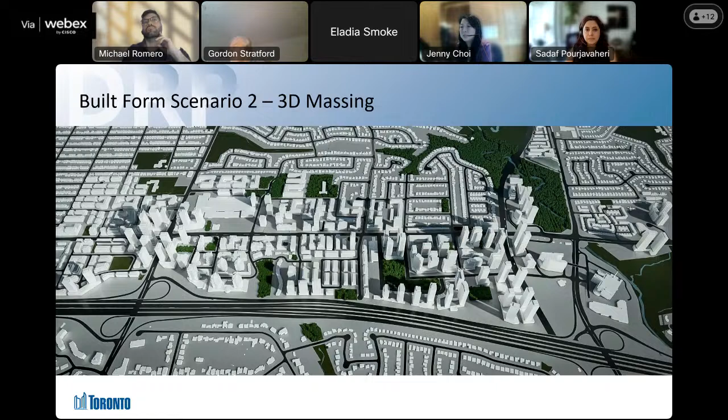Some of these areas have multiple condo ownership and multiple land ownership that puts them in the long-term planning horizon category, so they were included in development scenario 1 but not in this scenario.

Despite the differences between both scenarios, they both meet Renew's vision and guiding principles to provide complete, connected, sustainable, prosperous, and livable communities. In this sectional view, you can see the limits of the tall buildings at the transit corners, with the building typology transitioning to mid-rise buildings about 11 stories, as the right-of-way width for Sheppard is 36 meters, a 1-to-1 ratio, moving away from the transit stations along Sheppard.

This slide illustrates tall building typology along Sheppard. Currently there is no consistent front yard setback on Sheppard. Renew Sheppard encourages a consistent street wall, and where setback patterns are inconsistent, placing the base building at the required setback helps establish a pedestrian-oriented context, a high priority for residents. We aim to improve the public realm along Sheppard through this study and development review, alongside the Sheppard Avenue East Complete Street work.

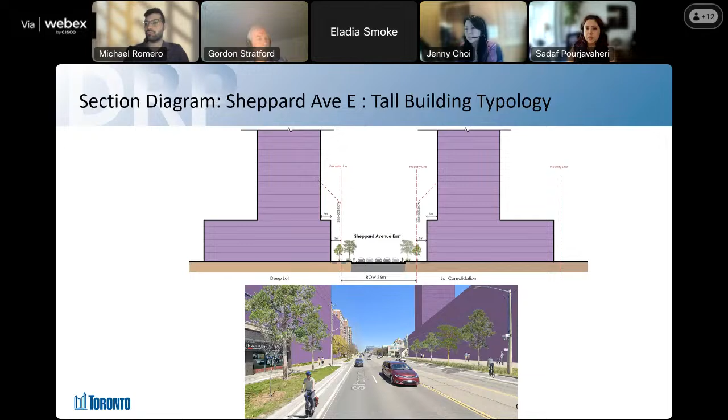Similarly, mid-rise buildings along Sheppard Avenue are required to provide a front facade angular plane above 80% of the right-of-way to create a pedestrian-oriented streetscape. These step-backs help mitigate perceptions of height from the street and ensure sunlight and sky view on the opposite sidewalk. Additional height that exceeds the right-of-way width will require additional step-backs.

Just wanted to raise my hand for a moment. You have a minute left, but I see you probably have more slides than a minute will take. How much more time do you need? I think one minute would be enough. Okay, try to wrap up, or is that the entire presentation? Maybe two or three minutes? Okay, let me give you five more minutes. How's that sound? Okay, thank you.

From these slides, we will see three conceptual structure plans and 3D maps for the redevelopment and public realm enhancement around three nodes.

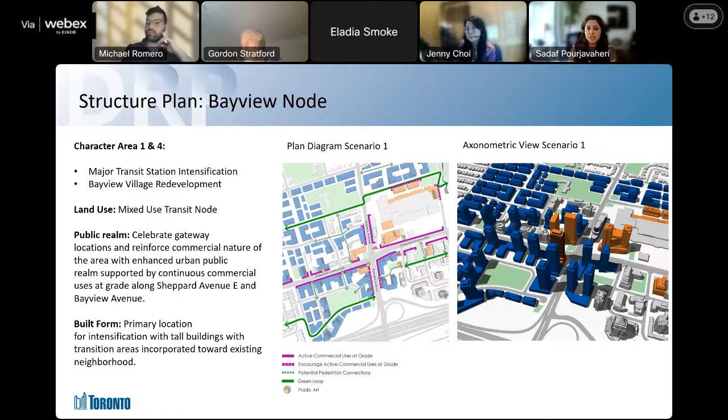This is the Bayview major transit station. The focus is on creating a high-density mixed-use community that integrates new residential, commercial, and transit uses. We aim to preserve the existing character by promoting a smooth transition in building form toward the surrounding neighborhood.

The sectional diagram compares the built form and transition in both scenarios and illustrates the relationship to the existing and planned context. As shown here, both scenarios account for the active applications within the area while providing a progressive transition and scale down toward the surrounding neighborhood, parks, and open space.

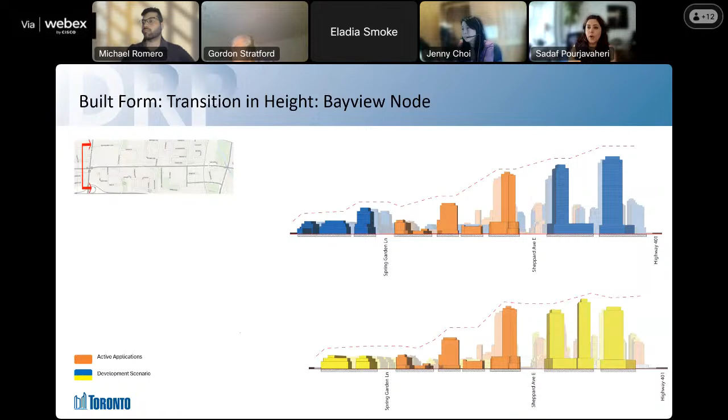Similar to Bayview Node, Bessarion Node is designed as a mixed-use character area with tall buildings contemplated at and around transit corners. A mix of tall and mid-rise buildings is strategically located between Highway 401 and Sheppard Avenue. Compared to the Bayview character area, which is mainly residential and commercial, the Bessarion area serves as a center of civic activity with at-grade retail, community facilities, and parks.

As mentioned before, built form transition is a key factor in forming the building envelope across the transit node and along neighborhood adjacencies. Bessarion Station presents a unique opportunity for transition in both scenarios. The lots have appropriate depth to accommodate different building typology and provide enough room for rear transition.

As you can see in this section, there is great variation in form. The massing descends toward the neighborhood to the north and ascends toward Highway 401.

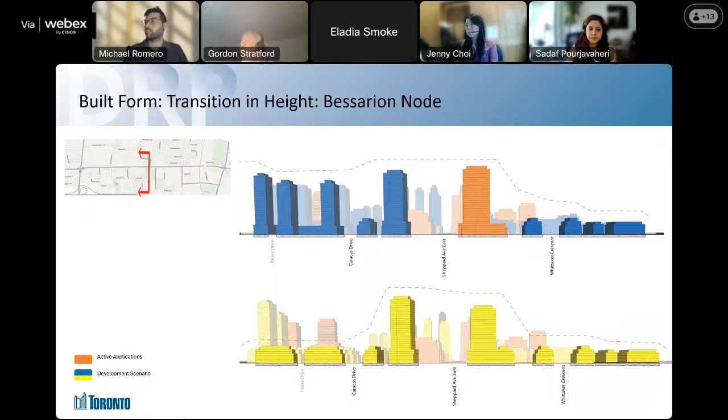Leslie Node emerged as an institutional activity center within the study area, and it offers significant potential for lot consolidation, enabling the establishment of a complete community within the large parcel.

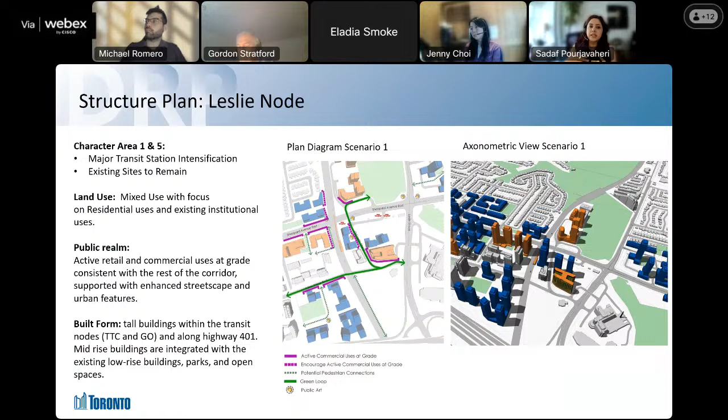The Leslie area presents a connectivity challenge due to the rail track that basically bisects the community, limiting opportunity for connecting between the two parcels. Also, grading is another challenge in this area, but through some application reviews, we are trying to leverage the grade and enhance the streetscape.

Our study team developed performance standards that inform and shape our model, shown in development scenario 1 and 2.

I'll pass it to Michael to finish up with the development review criteria. Great, thank you, Sadaf. So through the development of our two scenarios, we've also produced a review criteria to assess both options from a qualitative but also quantitative perspective, considering some of the constraints and opportunities that we heard from the first review panel meeting, and also the feedback we've heard from the community.

These scenarios were based on the 5 guiding principles that we have established through the study, and also the performance measures shared on the slide previously, the development review scenarios, and the public realm retail street plans that we've been presenting today too. We've also presented this material to the public in our recent public meeting just a couple of weeks ago. The intention at this point is to refine the project towards a more preferred option and then go back to the community for further feedback on that option.

As mentioned, the development review criteria is broken up into 5 criteria, complete community being one, but also scored on 3 metrics: whether the criteria best meets the vision and guiding principles, whether it moderately meets it, or whether the scenario least meets the vision and guiding principles.

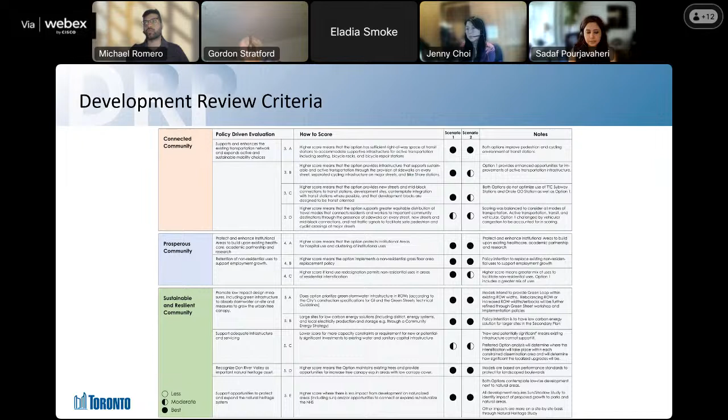And as noted here: complete community, livable community, connected community, prosperous community, and sustainable community. Now, we've developed these criteria in collaboration with our internal partners, and we will continue to revise it as we continue to proceed through a preferred scenario.

Now, that actually brings us to the conclusion of our presentation, and we have a couple of questions for the panel. The questions are here on the screen, but Gordon, I can put it now to you as we've concluded our presentation in terms of the next steps for the panel member responses.

Okay, great, thank you very much. And I'm just checking to make sure. Yes, these that are on the slide right now are ones that have already been shared with the panel members, so we'll take those into consideration as we go through for discussion.

First of all, thank you very much, that was a very comprehensive presentation. And we're going to move on, panel members, now to questions of clarification. So this is questions, not actually getting into the discussion itself, but actually asking questions to clarify the intent of the study that we're looking at. And Juhi, I see you have your hand up, so we'll start with you.

Thank you. Could you just provide a bit of clarification on the characteristic of the green loop? I'm just wondering, when I look at the map, it really appears that it's really like a secondary street with a full right of way and a sidewalk. I guess if you could elaborate a little bit on what the green loop is supposed to look like, what it's supposed to include as a design feature. Thank you.

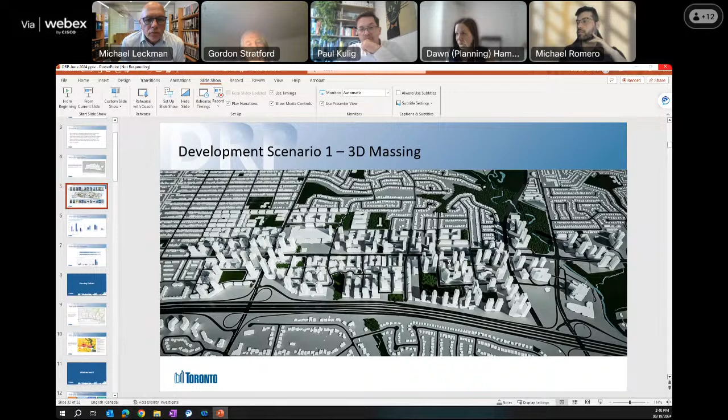Sorry, I apologize, my screen is lagging a little bit. We identified, yeah, here we go. We identified this as the Housing Now site.

Now, if you're also asking about this area at the intersection of Leslie and Sheppard, because I know this area is blank. I was wrong, I'm actually referring to the left side of the screen now. And is that Bessarion? Oh, this area over here.

So it's a large blank area. I'm sorry, I wish I could. My screen, I'm trying to get my materials back together again. If you zoom in to the center left, keep going, I'm sorry, this is awkward. Right there, that development— oh no, that was my cursor.

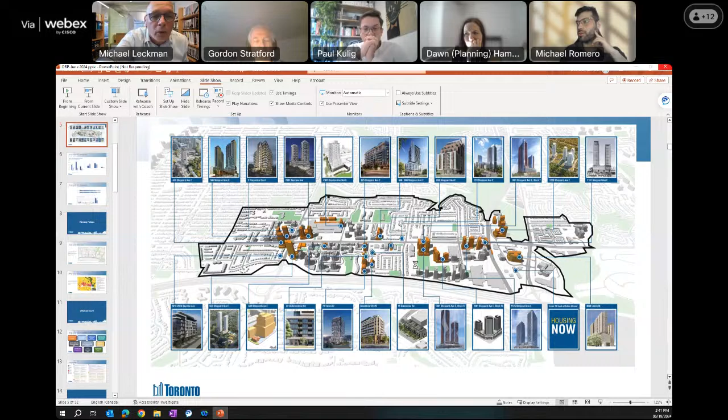No, sorry, so this blank area over here. Nope, keep going to the west, please. West, keep going west. And you've got Bayview Avenue. If you go north, immediately east of the Bayview Avenue developments that are applications, you've got a big blank site. Are you referring to this blank site on the mall? Because yes, there's a couple.

Okay, yes, so I think this speaks to the question earlier. We have a couple sites that have been approved on the mall site, such as this one over here, 2901, and this one over here as well, also 2901. But as this is a large individual landowner site, we haven't at this stage contemplated redevelopment models for it, as the intention is to work with this site on a more individual basis.

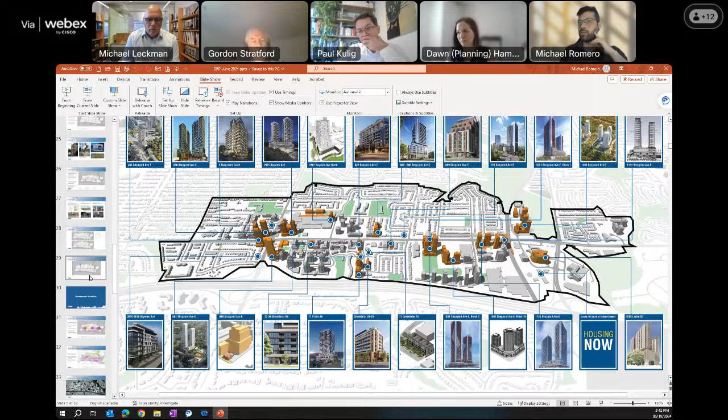There are a couple other sites which I'll note as well, where I'm just going to quickly refer to the massing model. These sites over here we've also left blank, because being such large individual sites, the intention in an eventual secondary plan would be to apply more site-specific policies that would coordinate the development standards of those larger sites.

So maybe just as a point of clarification, and maybe I'll extend this into my comments later, but if the intent is to represent a complete neighborhood with street edges, park connectivity and so on, is there an intent not to overstep the city's ability to comment on this particular site, because it represents 20% of the entire frontage on Sheppard? I just wondered if there could be some way to include a representation of the principles. Maybe you've given me the answers, but it stands out as a gap. But maybe the answer you've given is sufficient for me at this time.

Okay, thank you. Are there any other questions from panel members?

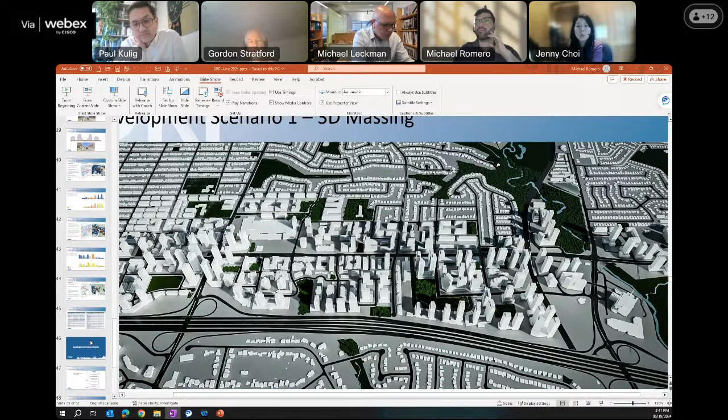I just have a couple of questions. I know we're taking a bit more time on the questions of clarification, but you've shared a lot of information with us, and we want to make sure that we're understanding it clearly and that it has all the information in it that we need in order to be able to give you input. In the notion about, I think it's called identity and character, just a couple of questions. Have you come to the point where you'd be layering on things like the social character of these different neighborhoods, and also, as an example, would an Indigenous heritage mapping also be part of your scope? This question is related to how you approach identity and character, and what are the tools that you're using in order to gain a full sense of what each of these areas within this study zone are all about.

So I'm not sure, Jenny, if you were referring to this. Yes, so our approach in identifying the community assets in the area is one of feedback from the community. We had asked at multiple consultation meetings, what was special to you? What was a building that you would like to preserve? What are the important destinations that you would like to maintain and protect? So those areas were from direct feedback and comments from the community, identified by the community. And so those local features that we wanted to support and enhance were areas that were identified for the community.